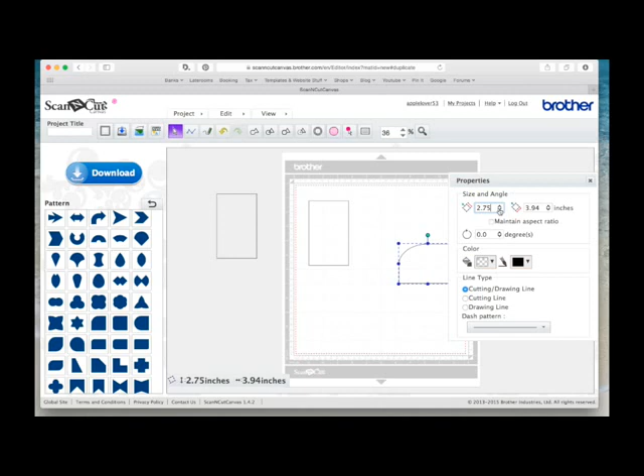Now I know this is 2.75 inches wide, so this one I wanted to be a little bit smaller so that when it was folded in and then the card folds over, it all folds over neatly. So this one I made 2.5 inches wide, and then I know that this is about 4.5 inches high.

So I just kind of placed it over and looked at it by eye. 2.75 is probably about right. It's slightly more than half, but obviously I don't need it to be as tall as the card.

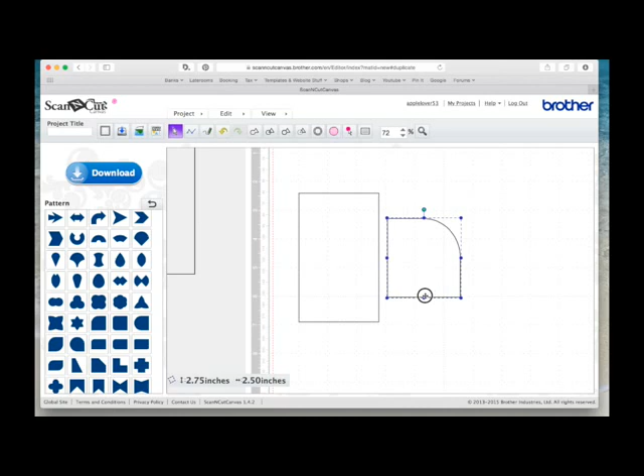So what I did next is, while this bit was selected, I went to Edit, Flip, Horizontal, and then aligned. So I want these two to line up on the bottom because I'm going to weld them in a minute. Just going to zoom in a little bit more.

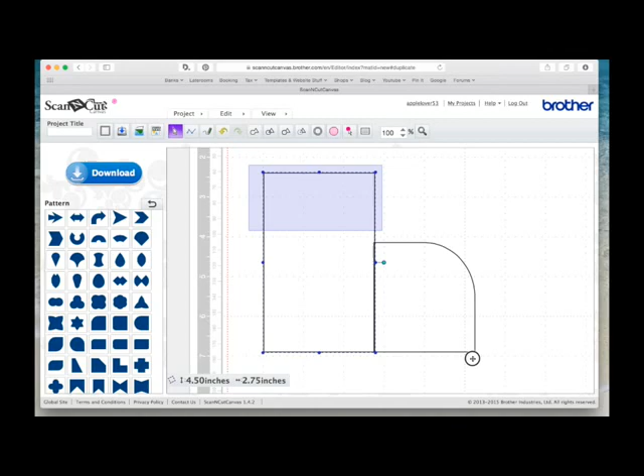And then I'm going to weld these two together. And they look as though they're overlapping, so I'll just back out a little bit. So I'm going to grab both of these. While these two are both selected, I'm going to hit weld.

Now I'm going to come over to the path tool, which is the one next to the selection arrow, and I'm going to click just on this corner here. Hold my shift key down to drag out a straight line, and when I get to this bottom line, I'm going to double click, which anchors the line and selects it at the same time.

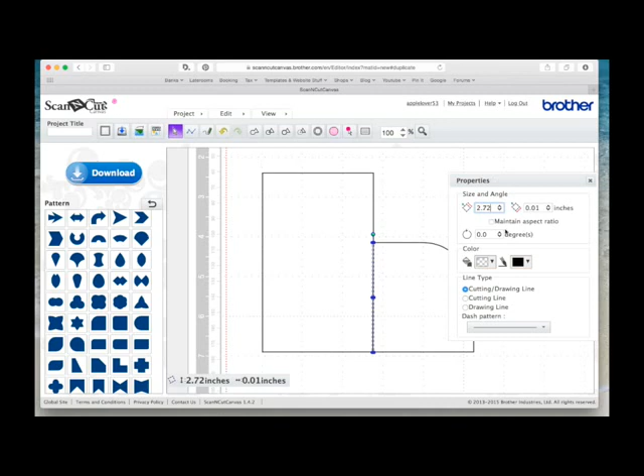I'm going to come to the properties box. I'm going to make it a cut line and then a dash line. And then if I click off, you can see that's now a dash line.

Now I need to add a bit onto the bottom here that's going to be my glue tab. So again, I came to the basic shapes and I chose this shape.

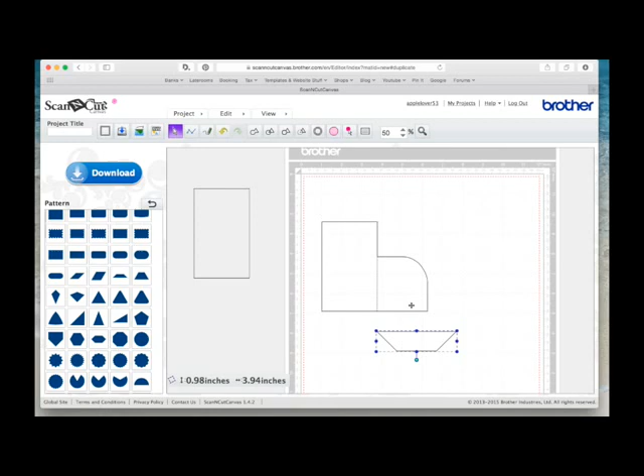Again, I'm going to hold the shift key down and rotate it. I know that this section here is 2.5 inches wide, so I'm going to alter the width of this to 2.5, because that's the width I made this section, if you remember.

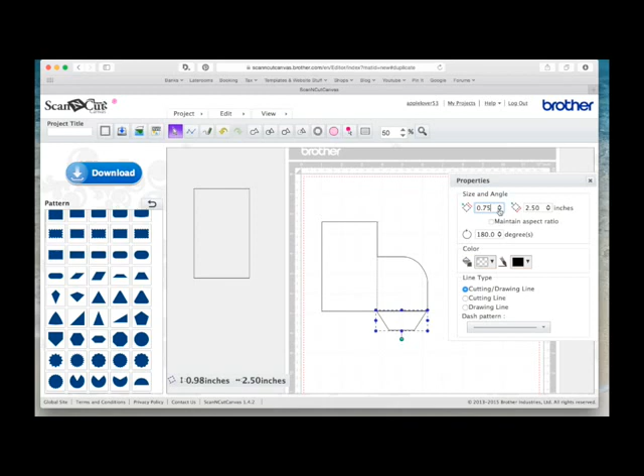And I'm going to position that on there, and I only want the depth of this to be about 1/2 inch, so I'm going to take, I've still got maintain aspect ratio unticked, so I'm going to take this down to 1/2 inch, and close that down.

Again, I'm just going to zoom in to make it a little bit easier to see. I'm going to bring this up here and position it, and I'm just going to bring it in ever so slightly in width. So you can see now that this, what will be the glue section, is sitting within where this dash line is and this outside edge.

Now these are all still separate pieces at the moment because I didn't group this dash line. So I want to just select the outside shape, hold my shift key down and select this shape here and weld those two. And because I hadn't grouped the dash line to this main shape, that's helped me weld this okay.

If I'd have already grouped this, you get an error message because it can't weld with what it thinks is an open path, which is this dash line. So now I'm just going to double click on here and get rid of a couple of these nodes that I don't need.

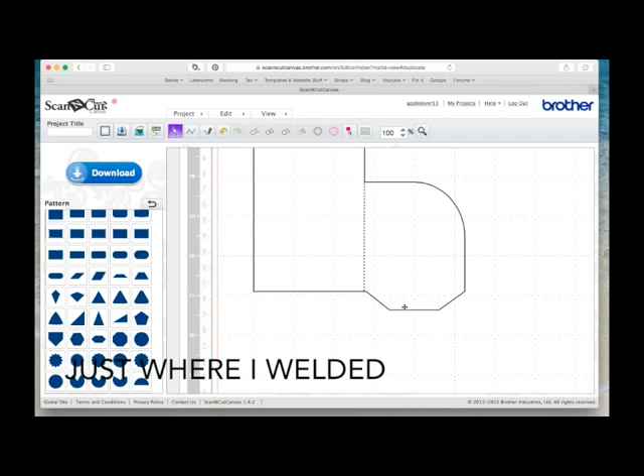As I say, I want a bit more of a surface area to put some glue on. So I'm just going to double click to select these nodes again. And I'm just going to bring this one out a little bit. And then I'm going to do the same on this side.

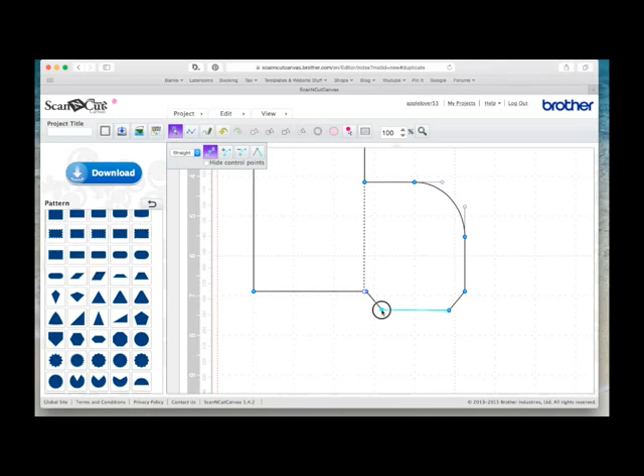And for some reason I've got a curve there, so I'm going to make it a straight line and then drag it out. This is just to give me, when I show you how to put this together, a bigger surface area to apply some glue on.

So now I'm just going to zoom back out. I'm just going to grab everything and move it over a little bit, and then bring this one in. Okay, so now I just want to weld this half to this half of this shape. So I want to put a dash line in here so I know where the fold's going to be.

So I'm going to choose the path icon, just click above where these two sections are going to join, click, hold my shift key down, and drag out a line, select the properties, make it a cut and a dash line.

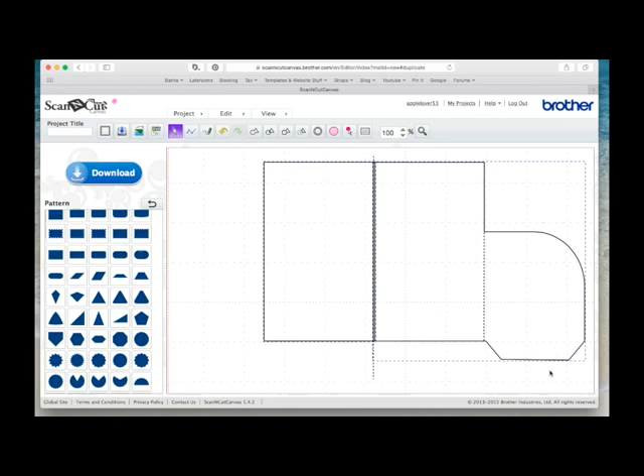Now I'm going to select this rectangle, hold my shift key down and select this half of the card. I'm not touching this dash line or this dash line, hopefully, and I'm just going to weld.

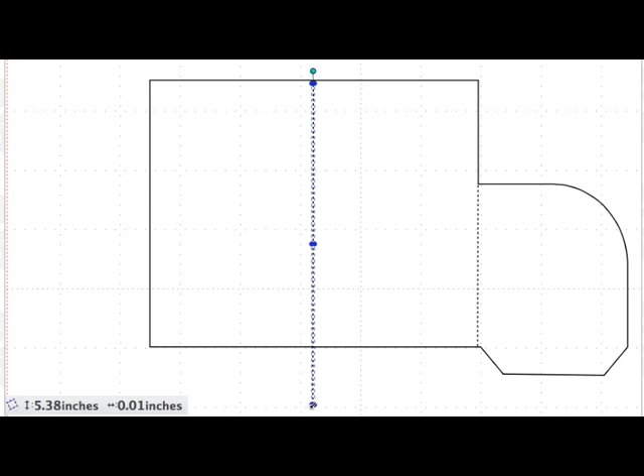Now I can see, because I made this dash line extend beyond the card, it makes it easier for me to select. Once I get the arrow that points up, if I hold the shift key down, I can drag this in. And I can do the same here, get the arrow so it's pointing down, hold my shift key down and drag this in, and I know that dash line now is in the middle of this half of this section.

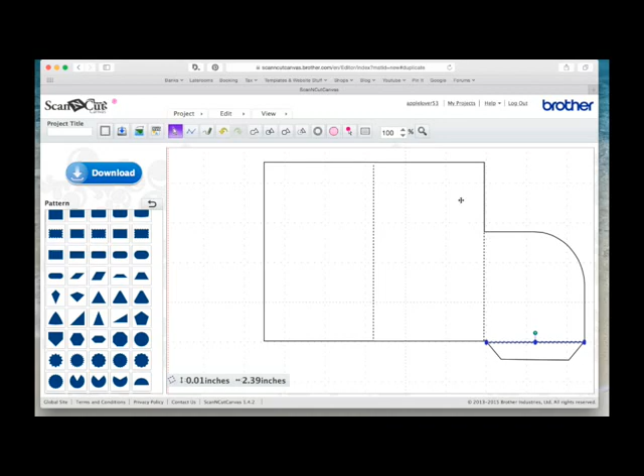Then I'm going to come to the path icon again and do the same here, put my fold line in. So hold my shift key down, double click, select the properties box, choose cut, choose dash.

Now I'm going to select everything and right click and group. So that's the group now, and I've assigned the dash lines and the cut lines.

So now I just want to make the piece of card that will stick on this inside section where you can write your greeting. I originally started off with 2.75 by 4.25.

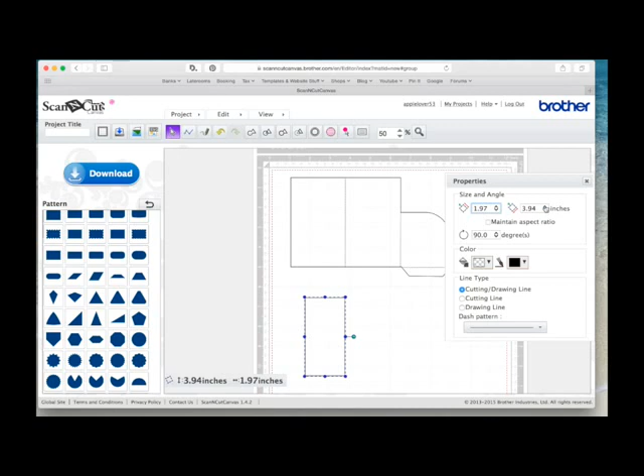So if I go back to the rectangle, hold my shift key down and rotate, come up to the properties box, keep the aspect ratio unticked, and if I make this 4.25 by 2.5 - oh, going the wrong way - that should now sit in there.

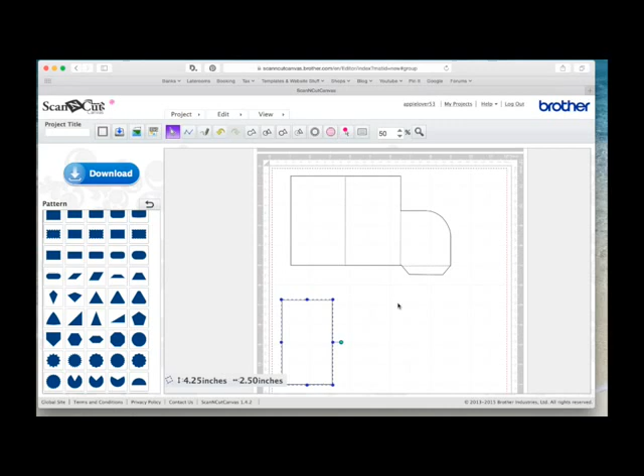So that's the bit that you can use inside to put your greeting on. I'm just going to give it a name now up here. I'm going to call it gift card holder. I'm going to save it into my projects, download it, and then I'll show you how to assemble everything.

Okay, so let's assemble it all. First of all, we're going to fold the score lines and burnish those.

And then this is the bit that you're going to put your glue on. This is the bit that I altered the width to give us more of a surface area when I was in Canvas. So fold it to what will be the inside of your card and apply some glue. I'm going to use some fast fuse because it's a stronger adhesive.

Oh, and just before I do that, I'm going to put my piece of pattern paper on this inside. So I've got some glue runner here. I don't really need fast fuse for this, it's only paper. I'm just going to position that kind of centrally there.

Now, this is the bit that's got the glue on here. I'm going to tuck it in and fold it over and just give it a burnish. And then just go over there again.